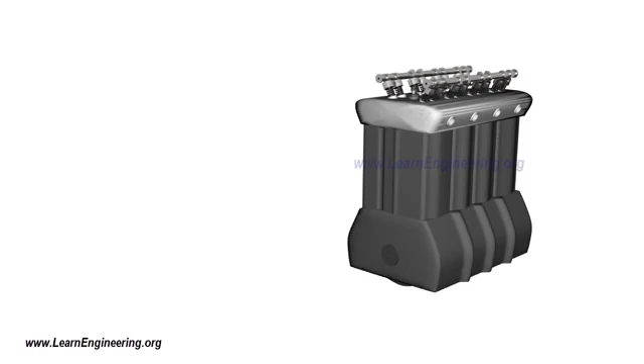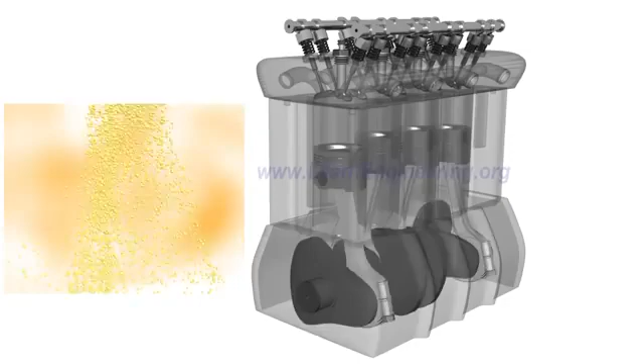An internal combustion engine transforms the chemical energy in fuel to mechanical energy. Diesel engines, which have been serving mankind for over a century, are the most versatile and economical IC engines. To release the chemical energy in diesel effectively, an atomized form of the fuel is made to contact with high temperature and high pressure air. This energy is effectively transferred as mechanical rotational energy.

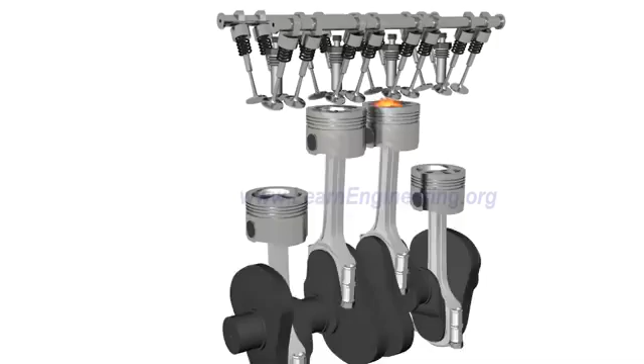So the operation of a diesel engine is all about producing high temperature and high pressure air continuously. We will see how this is achieved in this video.

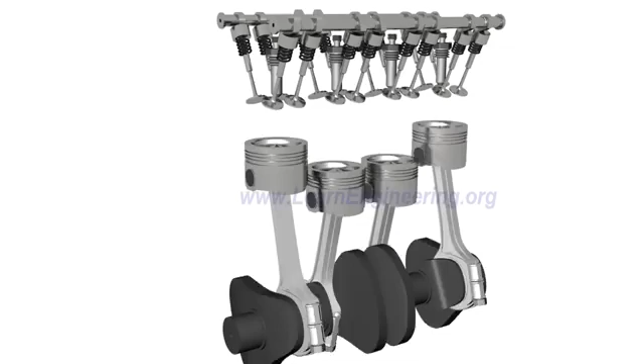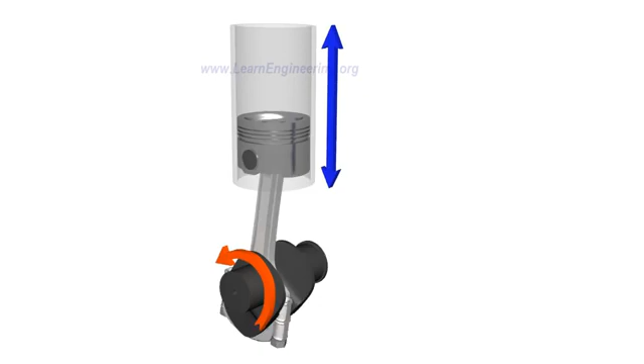Piston, connecting rod, crank, and cylinder form a mechanism called slider crank mechanism. Here, the linear motion of the piston is transformed to a rotary motion at the crank. In an IC engine, this mechanism is properly supported in an engine block.

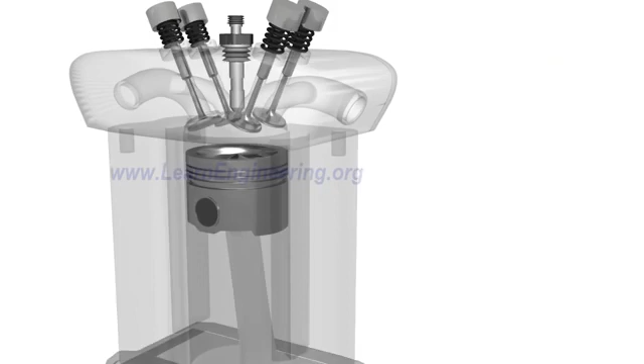Cylinder head, valves, and fuel injector are fitted above the engine block. When the piston moves downwards, inlet valves open and fresh air from outside is sucked in, or, in other words, the engine breathes.

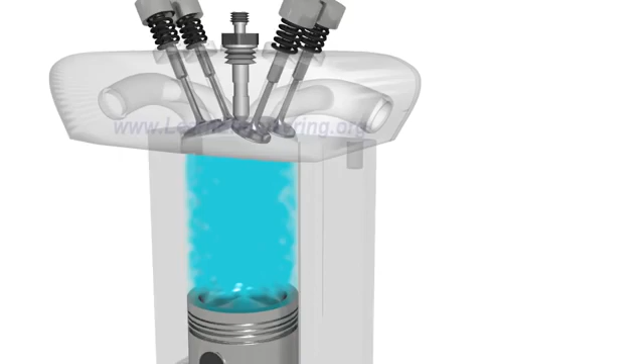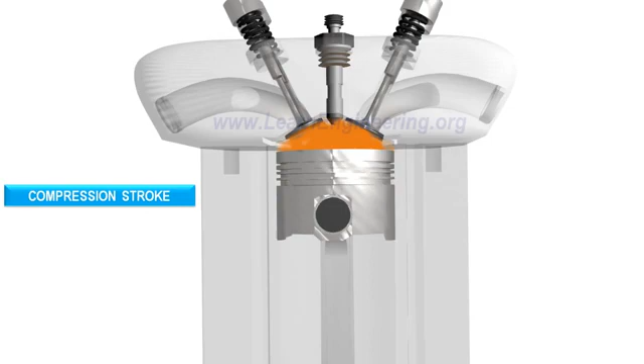During the return stroke, inlet and exhaust valves are closed, and the air inside the cylinder gets compressed. During the compression stroke, the piston does work on the air, so the temperature and pressure of the air will rise to a level which is higher than the self-ignition value of the diesel.

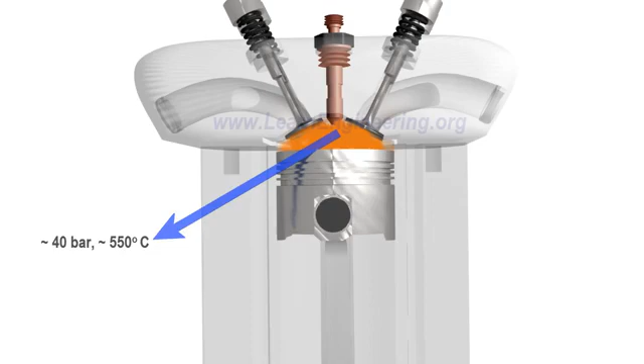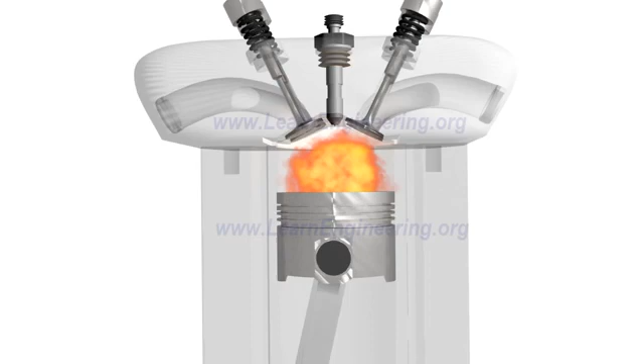An atomized form of diesel is injected into this compressed air. The fuel gets evaporated and undergoes an uncontrolled spontaneous explosion. As a result, the pressure and temperature rise to high-level values. The high-energy fluid pushes the piston downwards.

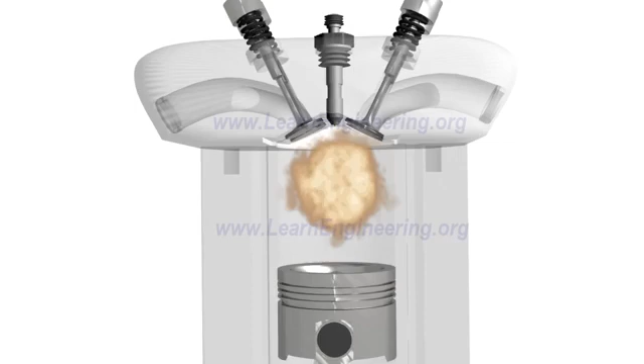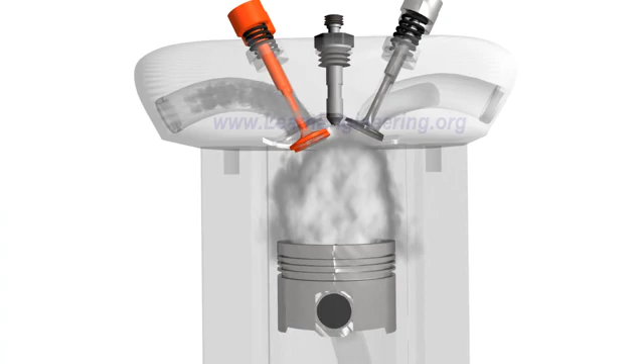The hot air does work on the piston, and energy in the fluid is converted to the mechanical energy of the piston. This is the only stroke where the piston absorbs power from the fluid. Due to inertia of the system, the piston moves upwards again. This time, the exhaust valves open and the exhaust is rejected. Again, the suction stroke happens. This cycle, which has a total 4 strokes, is repeated over and over for continuous power production.

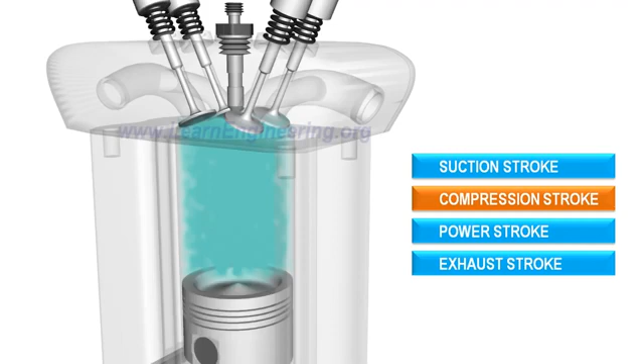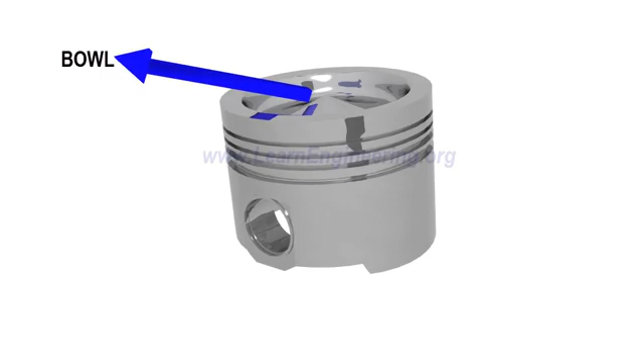You may have noticed that a bowl is provided on top of the diesel engine piston. During the compression stroke, this bowl helps produce air that is rapidly swirling. Thus, the injected fuel gets mixed with the air effectively.

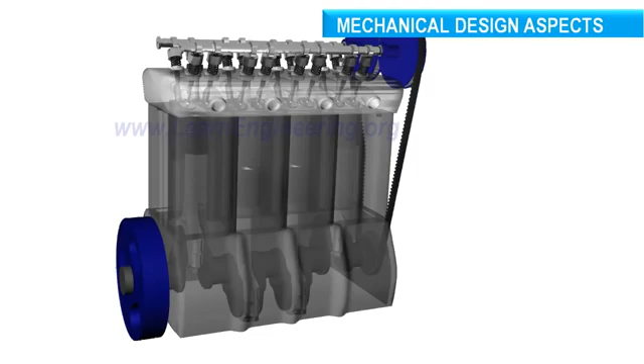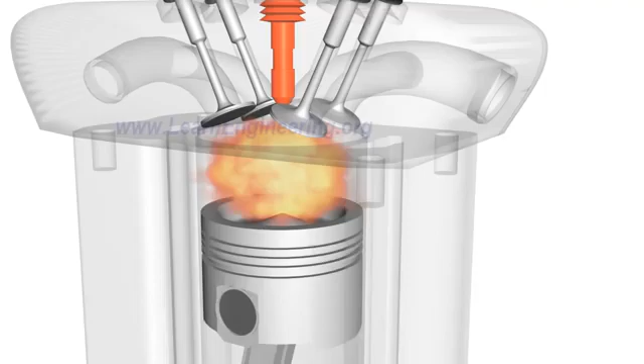The mechanical design of IC engines, particularly that of diesel engines, is a challenging and interesting task. Since the combustion process in diesel engines is never uniform and smooth, they are prone to more vibration and noise compared to petrol engines. Thus, diesel engines require a rugged structural design.

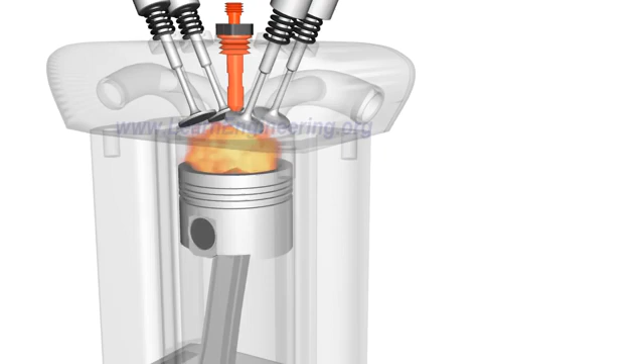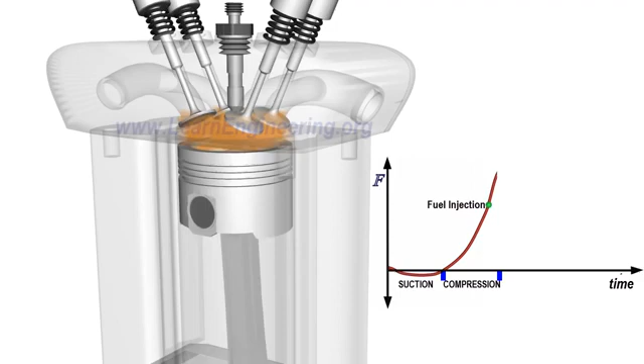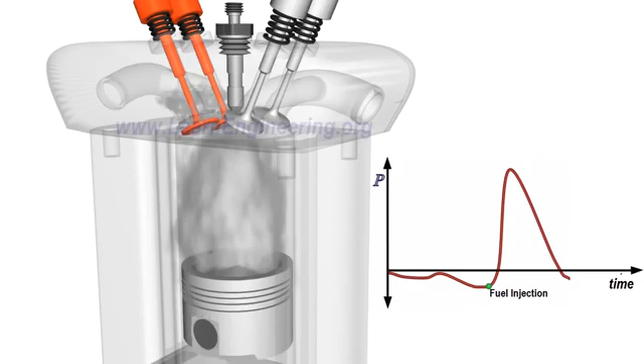Out of the 4 strokes, it is only during the power stroke that a tremendous amount of force is exerted on the piston. So a single-cylinder engine will always have high force non-uniformity as shown. Similarly, the output power will also have a fluctuating nature. But with more number of cylinders, one can overcome these problems.

Consider this 4-cylinder engine. Here, 4 different strokes can occur at a time. So the power stroke is always present in the engine. As a result, a 4-cylinder engine will have better force and power uniformity. In short, the more cylinders an engine has, the smoother it will operate.

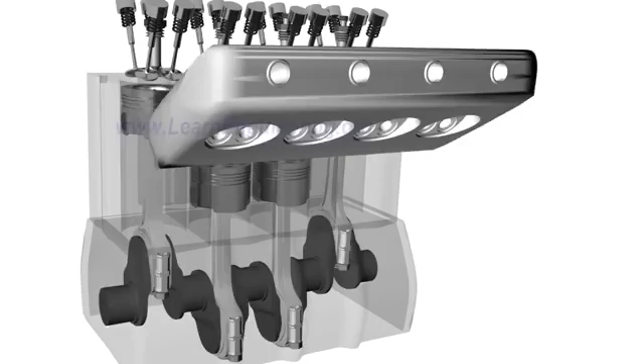A huge unbalanced force arises in the form of dynamic unbalance due to the excessive mass at the connecting rod side. This is negated by providing counterweights on the crank side.

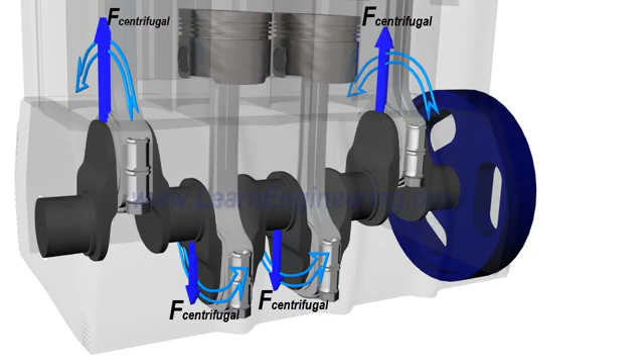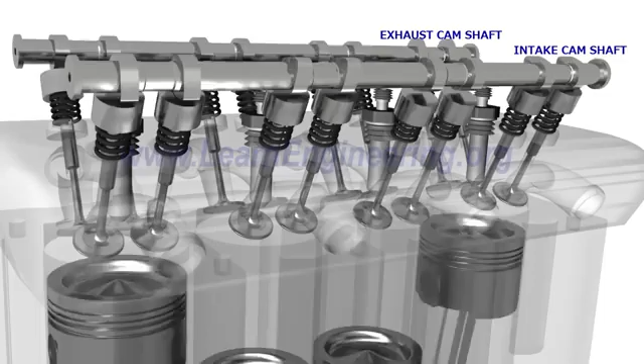Opening and closing of valves are accurately controlled by a pair of camshafts. Camshafts derive motion from the engine. It is clear that the camshafts need to rotate at half the speed of crankshaft.